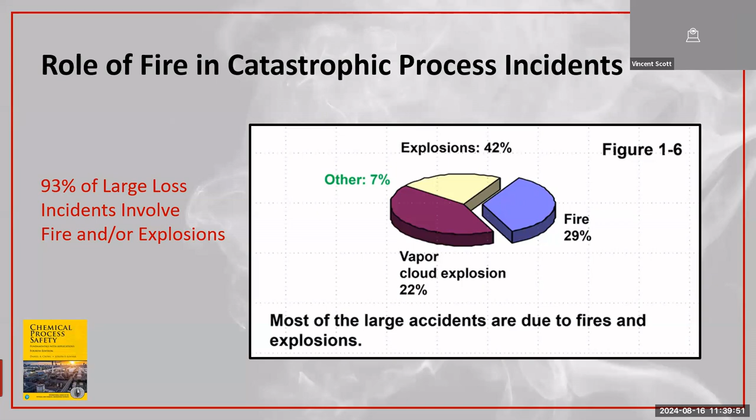Fire and explosion. 93%, I think it's a little higher now according to the latest Marsh report, of all large loss incidents in the chemical and petrochemical industry come from fire or explosion. It is a massive event when it happens. Through vapor cloud explosions, typical fires, or outright vessel or condensed phase explosions, it accounts for the vast majority of large loss events in the world.

I gave a talk to an OSHA conference in Tennessee about a month ago or so, and I had an intern aggregate a whole bunch of data on fire injury statistics. It's a complicated mess, and there's no really fun way to show it, but I did want to pull the last 5 years together because this is pretty representative of the trend that we really are not seeing a reduction in incidents that result in injury and fatality from fire, right?

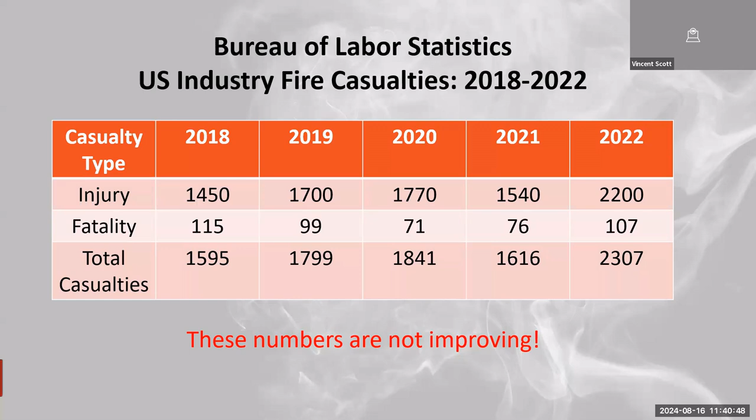They skip around, but when you do the math on these statistics, there is no statistical difference year over year on these losses, right? What you find too with reportable incidents with OSHA, the same sort of thing. Incidents kind of bounce around. A lot of people try to say they're tailing off, but when you really look at data, they're not tailing off that much. Now we're getting more industry and more complex industry, but we still have a very real fire problem.

And this kind of shows that it's representative across an awful lot of activities. From driving vehicles, storage, hot work, all of your usual suspects. But for the most part, when you look at this pie chart, fires can occur during all kinds of operations. That's one of the reasons I love it, right? As an engineer, I've worked on fires from teeny tiny little control boards to massive multiple mile explosions in coal mines, right?

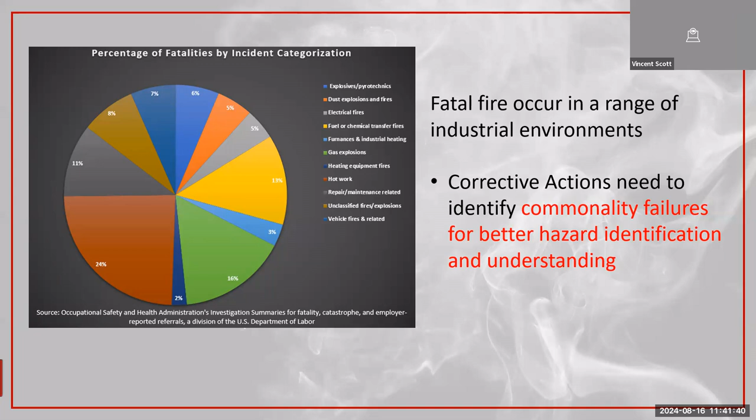So you really get a lot of situations that these basic principles apply in. And again, if we can remember these principles for fire safety and figure out which ones apply to you in given situations, it puts you way ahead of the game from a safety perspective. Okay, so when we do an investigation,

NFPA 921, which is really our driving document, but most forensic societies or engineering groups, when you talk about doing forensic analysis or failure analysis, we're engineers or professional scientists of some sort, and we're supposed to use some sort of science and methodology in what we do. I kind of like this concept of the scientific method put out by 921.

They go through: recognize a need. It's like, we have to do the investigation. Define the problem. It's basically, there was a fire. We want to know what started it. And then we get to the good ones here of collecting data, analyzing data, developing hypotheses, and testing hypotheses. And it's going through these steps that gives validity to the process because it allows you to iterate, right?

As you come through and test your hypothesis to see if what you think happened and what you think was the causation of the incident actually fits with the data and the analysis you did, that hypothesis works, okay? So this can be kind of a nebulous thing, but I do think if you adhere to this kind of methodology, when we have the incident at Randy's section of the plant and we do that investigation, we can hand it to anybody else, and they can see exactly how we arrived at the conclusions we did, right?

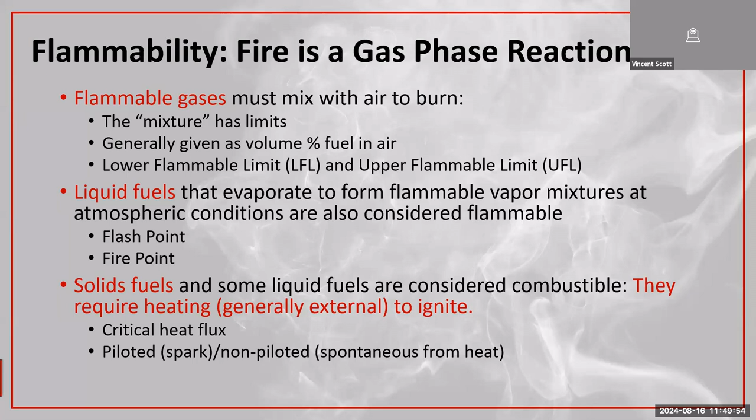Now dust fuels are kind of interesting because they sort of live in this hybrid space. A dust that's laying on the ground, I can light with a match, and if I can eventually get that to burn, it will lazily burn across the top of the table. I could have another set of dust where I accumulate them into a big pile. And because of the biological or chemical activity, it self-heats, right? It has the ability, like oily rags or hay that gets wet, to self-heat. So dust can burn, they can self-heat, or they can be suspended in air and become explosive very quickly.

And when dust becomes suspended in air, if they're at the right size or if they're finely divided, they are as ignitable as gas clouds, and they're almost 10 to 100 times thicker, which gives them 10 to 100 times more radiant energy. Meaning, in Randy's incident, right? If Randy had screwed up a gas exchanger, a natural gas handling unit, and I'm standing over here, it creates this fireball, I might lose my eyebrows or singe my hair and be like, Randy, what the hell?

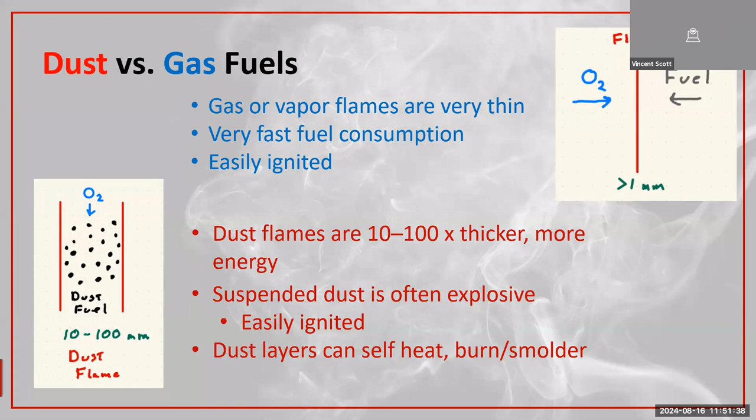Right? If we had a dust handler or a bag house and the same incident happened, I'm receiving at least second and more than likely 3rd-degree burns, right? Because of that exposure time from the dust fuel. So dust fuels are particularly hazardous to workers and particularly invasive. They get everywhere.

The other thing about dust, I talked about how easy it is to ignite. Here's common static ignition discharge energies. All but the smallest corona discharges, which will still ignite gases and vapors, will ignite powder. So any self-respecting electrostatic discharge has the ability to ignite both gases and powders, which is why, again, these suspended dusts are such a safety hazard.

This is a different fuel. This is one for people in the food industry here that work with spiral freezers, okay? So I do a lot of work for Nestle and some other food companies, Nestle being the biggest one, but when you bake prepared food, it comes out of the oven piping hot. They got to get it to a certain temperature for the sterilization process, and then 10 minutes later they want it on a truck headed to a supermarket, right? So in order to get it frozen that quickly, they have these massive freezers with residence times of about 15 minutes. This was a Hot Pocket operation.

It went in piping hot, and by the time it came out, you could kill somebody with this thing, right? Shatter if you drop it. But this belt material, this blue belt material, is, excuse me, not formaldehyde-based, but it produces formaldehyde when it burns. It is a polymer with a surface tension where the beauty of it is that you can set pastries on it at almost any temperature, they can be sticky or whatever, right? I'm not the best cook, but you can set these pieces on it.

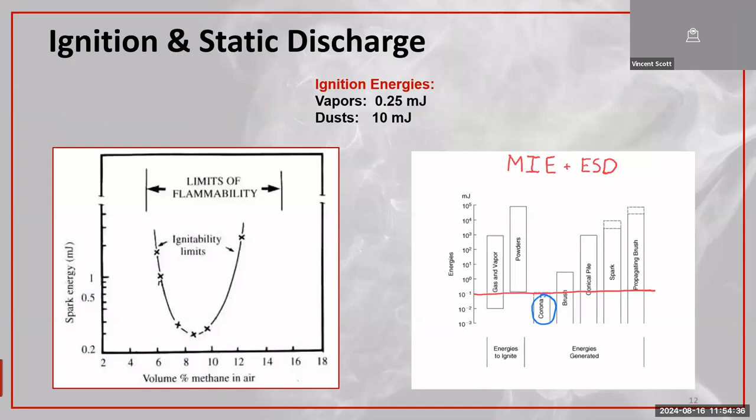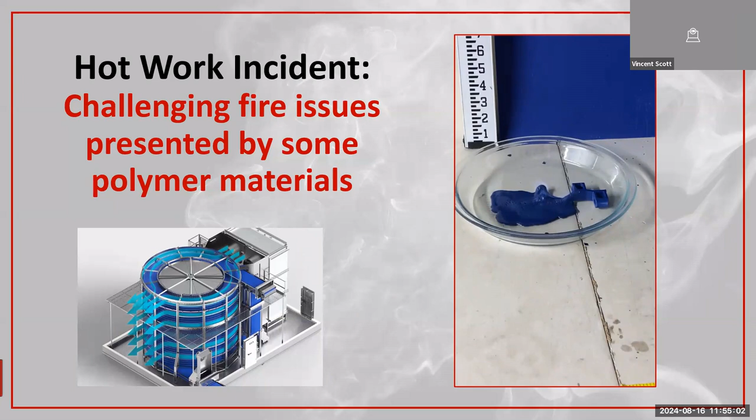It was burning for several minutes and the workers didn't realize it because they couldn't see the flames. That's in my laboratory, and you see those flames when you're right up on top of it, but they started it near the middle of that spiral and it eventually took out the entire factory. So new materials that have very limited fire testing data on them, you really want to understand before you put them in your facilities.

Now it gets more fun. We have some explosions here. So I think one of the biggest releases that's relevant for a bunch of people are flammable vapor cloud releases, right? Of all of the explosions that I've dealt with that have really taken out property and people, it's vapor cloud explosions. And vapor clouds, if you release a vapor cloud in the middle of a football field, you end up with a nice flash fire or a big fireball, right? It can be decorative, right? The cheerleaders like it, everybody's.

However, if you change the geometry of that situation just a little bit, things can change drastically, all right? So for the most part, you fill a volume like this with a mixture of like methane. This is methane and air. And we ignite. These were tests that were done in Norway to do some explosion classification. When we ignite on this end, this little chamber has these support beams in it, and uniformly, right, it's one big gas cloud, uniformly filled with methane and oxygen or air. And this is to look at the burning velocity.

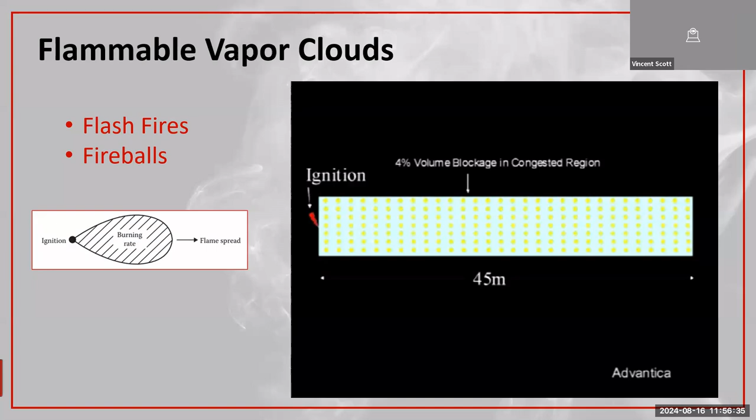You're going to see an ignition on this side. It's going to be pretty quick. So you'll see the propagation of the flame this way. And so flame speed propagation is like the speed of sound. For any given mixture, that flame speed should have a max value we can hit. So this runs. There we go. So watch the ignition on this side.

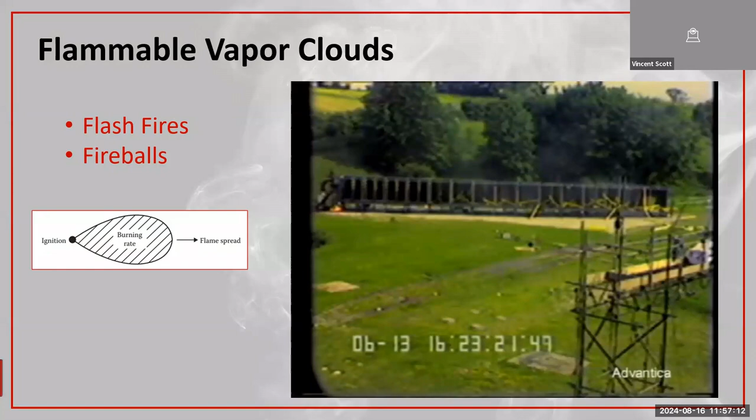Okay, so if you had a release, that football field type release or release in one of your facilities into an empty parking lot, something with no obstructions, this is the kind of behavior you would expect. Very little pressure is generated, but it's going to roll through that flammable mixture and take out anything with it. But the overpressure, the blast wave, is going to be extremely limited. Okay. Now, same scenario.

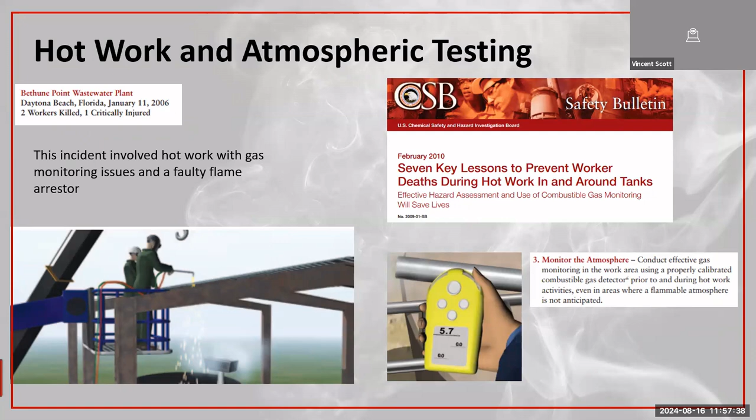This is an old CSB video. This was in Daytona Beach, Florida, where these guys were doing some hot work up above a methanol storage tank. You guys might have seen this video. The investigation determined a non-functioning flame arrestor. And they're showering sparks down on top of this thing. And the idea here is it's gas monitoring.

Now, I don't have the actual video from that one, but I do have one that I investigated out in Lemoore, California, a little bit over a year ago. It's a water tank. This is a sad story. Water tank coming out of a municipal well. They were decommissioning it. It still had water in it. The guy was going to put a big cut in it. The well's right there, just a big water storage. You'll see it. Bring your kid to work day. The guy who is doing the cut, his son, is sitting about 100 yards from where this whole thing unfolds.

This is from a security camera across the street. It's the water tank. Get another angle of it here. He's on a lift that you can see gets shot across this way. You can't see it at that angle. But on that boom is where the guy was, right? But that was water. They called me, I do work in the Central Valley of California for a lot of these municipalities. They called me, they're like, what the hell, right?

So I said, go to the nearest spot from there, which was this junior college across the street. They took a little water bottle, shook it up, put a gas meter on it. They were well above LEL. It was from the methane that they were pulling out of the municipal system. So as you can imagine, it's an interesting problem for a city to have. There were industrial plants nearby, and everybody's fire water tank was effectively a bomb in the distance. We had to get that cleared out and addressed, and help them install an air system that eradicated the methane from their water system. Common with the drought, they had this in a couple areas in that basin in Central California. But that was the first one. That was pretty brief.

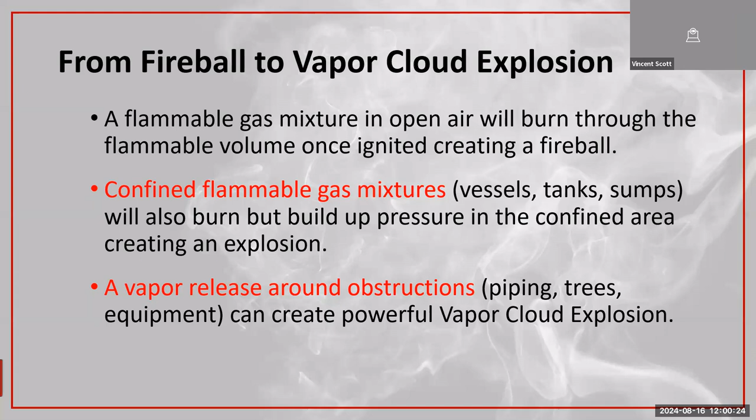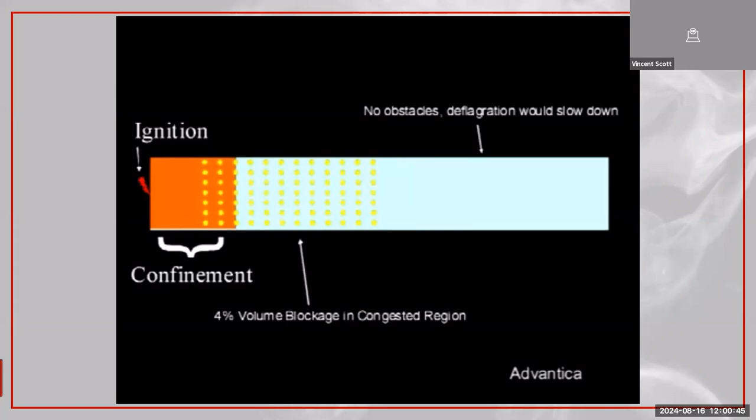This is a test. Here, the only place we have fuel is right here. So this is a combination of confinement, obstruction, and then just empty space. The only place there's fuel is right here. But the point here, the result of confinement and obstructions in the flow path, watch the difference in these explosions.

Okay, less fuel, right? Different geometry, bigger punch. That's a several PSI overpressure explosion that takes out walls, windows, and people's lungs.

So, in conclusion, I would reiterate the point that I am a firm believer in sound scientific investigations and developing those into good work practices, right? I've seen too many investigations in my life that go into litigation, they do whatever. It's all well and good, it all makes money. But the reality is when we can tune these into process plants and take all of that vast information we've learned and create good categorical things for them to live by, that's the best use of these reports.

And why I say that is, I've been working about 30 years, I've been investigating stuff about 25, and there are so many commonalities in accidents, right? I am sure you guys see them too. For fire, it's fuel state, right? Solid, liquid, or gas, really going to impact your hazard profile. Dust fuels, always be leery of dust fuels. They are potent and they cause much more severe injury than gas flames do.